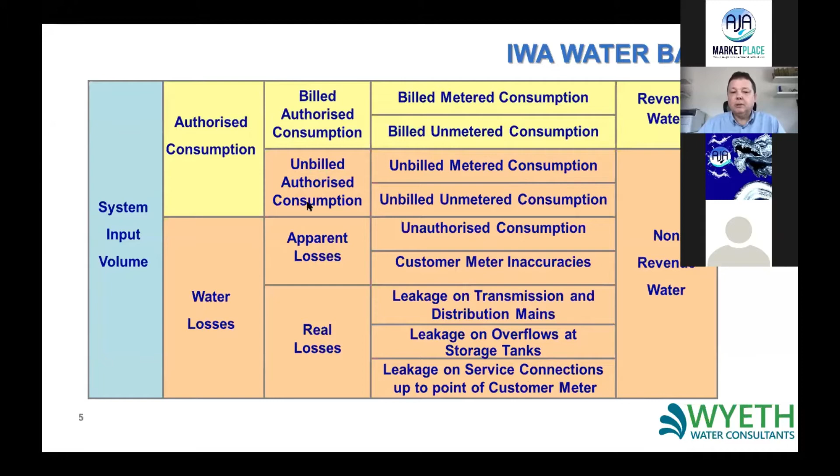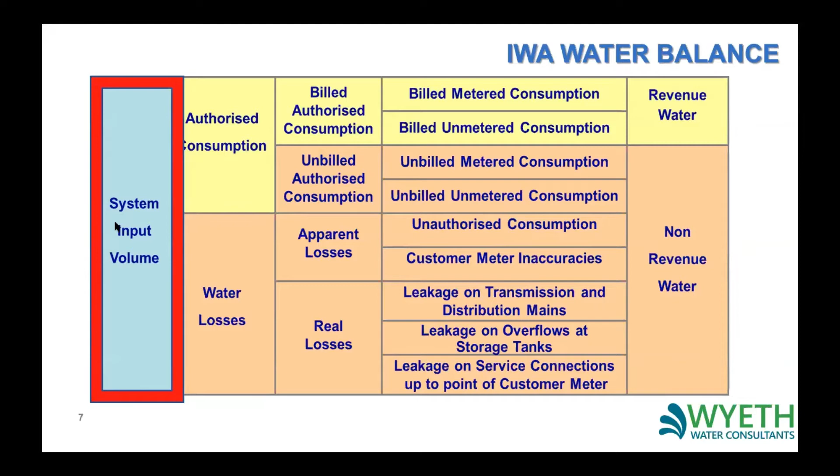So let's start with flow monitoring. One of the key things we need for flow monitoring is, as I've already mentioned, the flow coming from your water treatment plants. If you're not logging or measuring the flow from your water treatment plants, then you really can't start to calculate your non-revenue water. It's one of the key components of calculating the volume of non-revenue water that you have.

So for all of your water treatment plants, you need to be looking to see how many outlets there are from the plant, how many pipelines are being fed from the plant, either under gravity or under pumping. And you need to be installing some production meters that are actually measuring that flow rate. You can see here an example on the right, which is actually an electromagnetic production meter. We'll talk a bit in a minute about different meter types, but the electromagnetic meters are probably the most accurate flow meters that you can get.

So if you are looking at measuring your production, you need to consider that you probably haven't got too many treatment plants and not too many metered outlets are required. So it might be somewhere around 10 to 20 of these meters. So purchasing some good quality, accurate meters is probably a good thing to do at the beginning. And as you only have a small number of them, then for this case, the electromagnetics would be good.

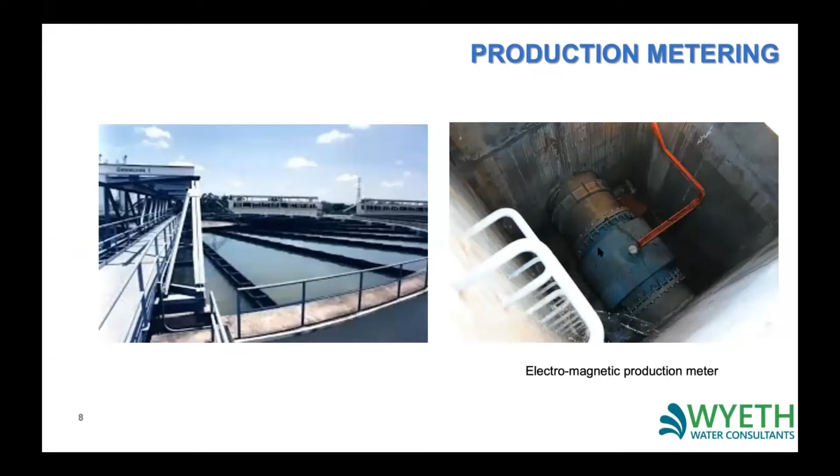These electromagnetic meters are full bore, so you would need to cut the pipe and insert the meter in. And obviously, as they get bigger, the meter price itself gets more expensive, and also the installation costs get greater as well. Whereas for ultrasonics, you're really going to be almost the same price no matter what the pipe diameter is.

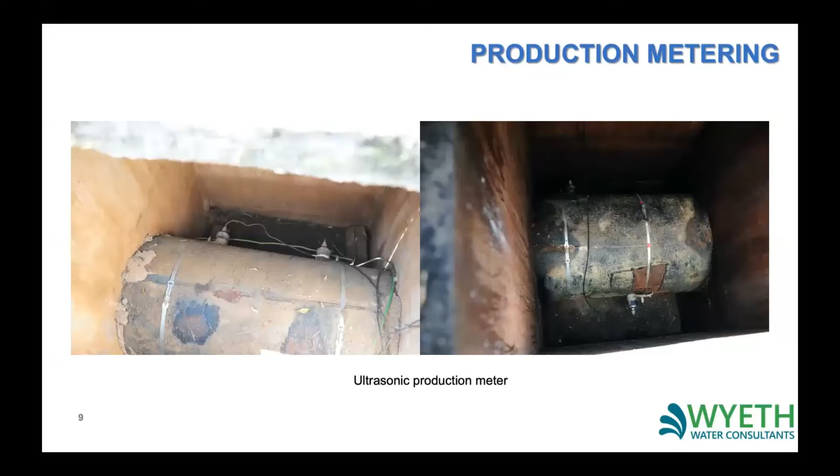So what does it look like in accuracy terms? I think Ryan showed this table last week. And I mean, these are just indicative accuracy ranges. If you actually speak to different meter manufacturers, they'll probably give you the true accuracy ranges.

But a lot of your meter manufacturers have their accuracies calculated on big test rigs that they have in their factories. So when you put them out in the field, there's going to be a number of different issues that can actually affect the accuracy, including things like pipe material, temperature of the water, straight length of pipes. So don't always believe what the manufacturers say - there's going to be some leeway in what the accuracy is really going to be.

But you can see here that the electromagnetic flow meters are probably going to be the most accurate. But if you look at the ultrasonics, you can see that there's still a relatively good accuracy, which is between 0.5 and 1%. So whichever one of these you choose, you're going to be below 1% accuracy of your production metering.

There are a few other metering options - insertion probes, mechanical meters and such - which you could look at depending on the cost side of it. But with the mechanical meters, they're really more for small diameters.

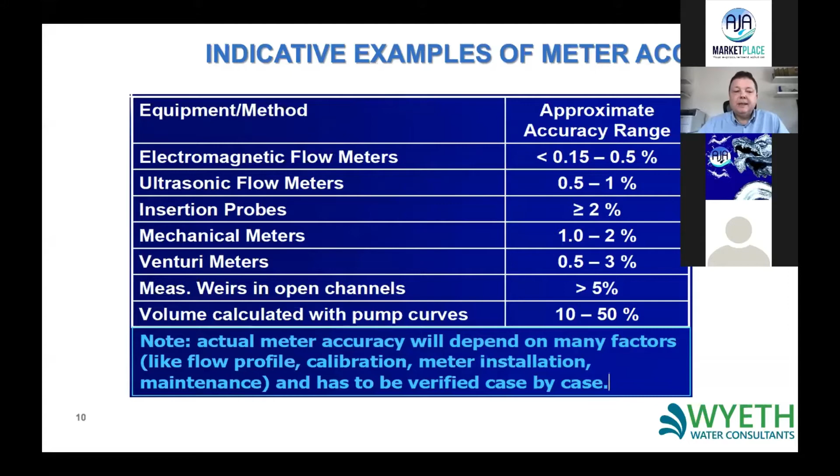But once you've put the meters in, as I've mentioned, they do need maintenance. You can't just put the meters in and then forget about them. Some manufacturers have calibration software which you can connect the meter up to a laptop and do some calibration, but really they're only calibrating the electronics.

So you may have to do some validation of the flow rate as well. You can do drop tests. For example, if the meter is coming out of a reservoir or flowing into one, you can close the outlet or inlet and measure a drop in the reservoir level, then compare that volume to what's gone through the flow meter. That gives you an idea of whether you've got the volumetrics right.

You could also use an insertion probe, which we've already talked about. If you install one just downstream of your production meters, you can compare the insertion probe with these meters. You're not going to get exactly the same flows because of different accuracies between metering technologies, but at least you know if you're in the right ballpark within 2 to 4%. If you're out by 20%, then you know there's obviously an issue.

Now, some water utilities actually buy their water rather than operating the treatment plant themselves, either from a third-party treatment company or from a neighboring water district. If you're buying water from somebody, it's even more critical that you're measuring your production accurately, because that's affecting how much you're paying for the raw or treated water coming into your system.

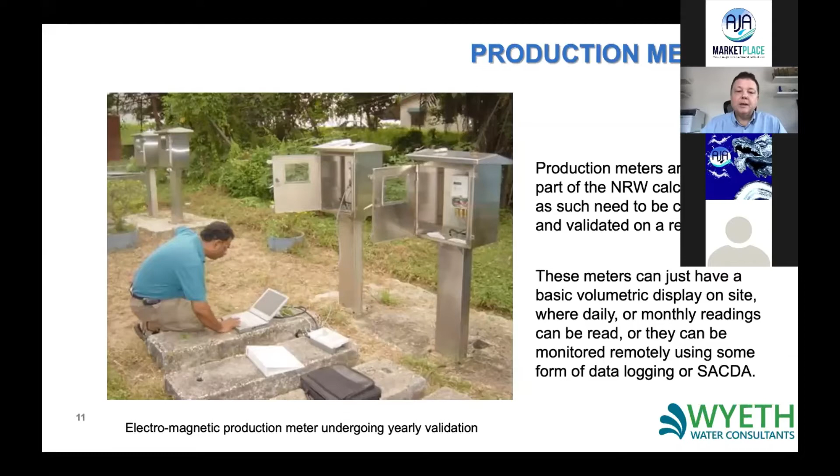The other option, often used by a lot of people, is to use data loggers or a SCADA system. You have communication from the meter, logging the flow rates, then sending the data off to a control room or control center, which can be at the treatment plant itself or at the water utility's offices. That way you get flow patterns, not just totalizers or volumes over a time period, but you can see when water is being used more or less than other periods.

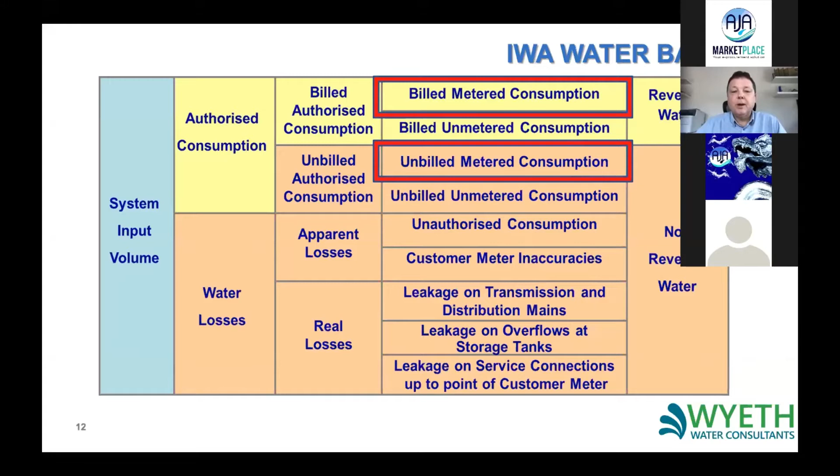The other key metered component is customer metering. In the water balance, we have two components: billed metered and unbilled metered. Billed metered is everybody with a meter, and at the end of or during each month the meter reader comes around, reads their meter, and they get a bill. The second is customers who have meters but for some reason we don't bill them. This could be a decision made by local or federal government, for example churches or military camps. They may have a meter, but politically you can't bill them. But even though we're not billing them, we should make sure we're metering them so we know how much water they are consuming.

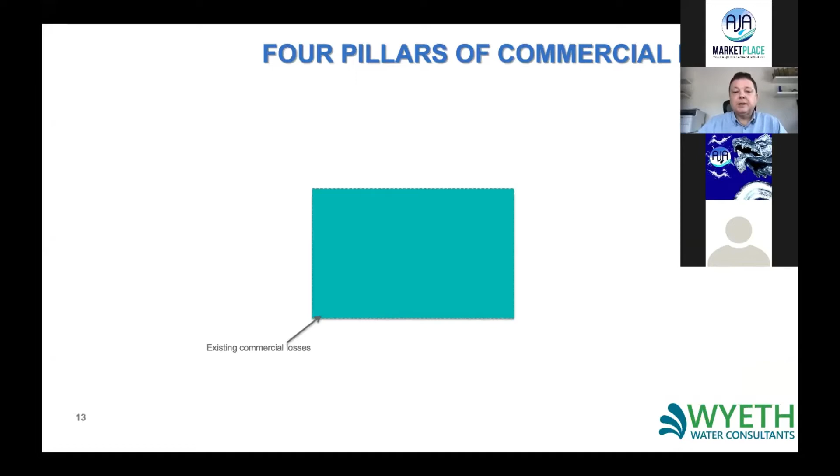If we look at commercial losses - because this is the metering, the customer metering side - any errors we have there are what we call commercial losses, because not only does it affect your non-revenue water, it actually reduces the revenue coming to the utility. So if you can maximize the efficiency of your customer meters and the billing side, you're actually going to maximize the revenue coming into the utility.

So all utilities will have an existing volume of commercial losses, symbolized by this green box here. And then we also have what we would call an economic target of commercial losses.

Economic target means we're weighing up how much we're spending on things like meter replacement, meter billing technology, and meter reading technology. On the other side, we have the weighing up of how much revenue we would get. So there's an economic target we want to aim for. We're not going to get it down to zero, but we want to get it down roughly to that economic target, and what do we need to work on that can help affect that?

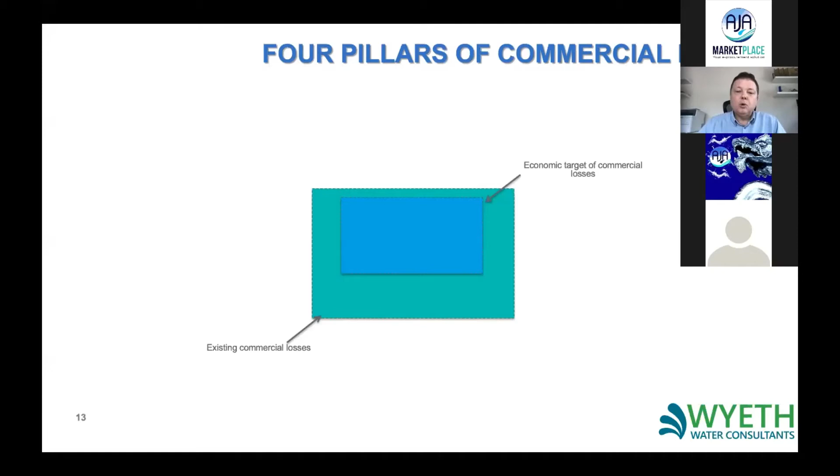Well, we have meter under-registration. This is your customer meters that are no longer accurate. Hopefully, when you put a new meter into the ground or install it on a customer's pipework, it's going to be fairly accurate. But over time, the accuracy of that meter will start to reduce as the meter wears and gets tear from just performance of the meter. So you need to be deciding when do I need to replace those meters once the accuracy gets too low.

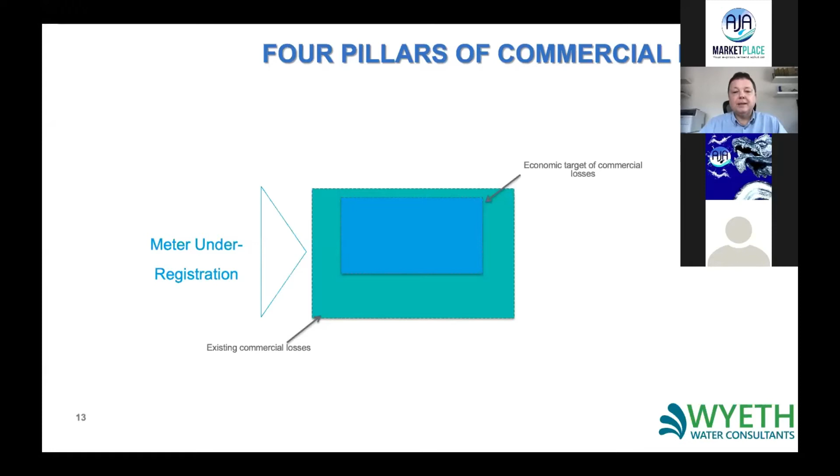We have theft of water. Something that's quite important in some countries is people that steal water. This is not something we're going to be looking at today, but it can be a large portion of your water losses, or it can be a small portion, depending on how big a problem it is in your utility.

Then we have meter reading errors. So how do we go about and read the meters? Then how do we issue the bills to the customers? I'll talk a bit about that in another slide coming up.

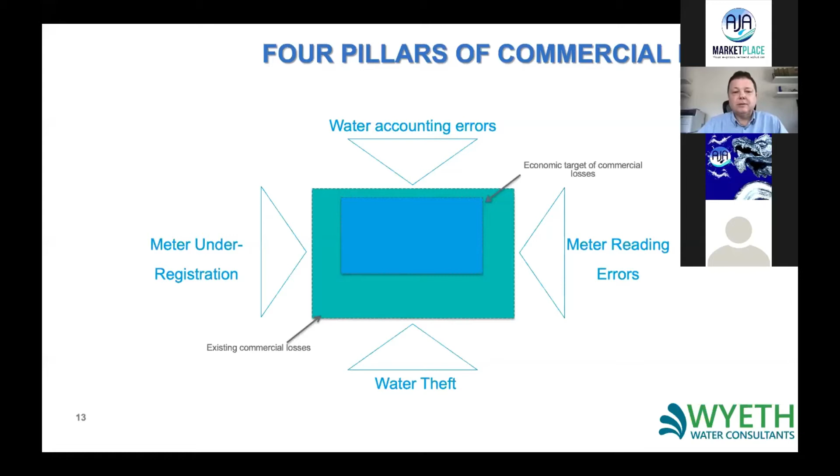And then the last one is water accounting errors. So once we've read the meters, we then need to put those meter readings into a database, a customer database, before we issue the bills. I'm sure most people have used Excel before, and they've typed in the wrong number into an Excel sheet and wondered why there's errors coming up. Well, if you have a system where you've got thousands of numbers that need to be inputted, then you can see where we could have errors that are occurring.

So we're looking to resolve all four of those issues. And if we can resolve all four issues, we can actually reduce the existing commercial losses, and we can then move it down to that economic target.

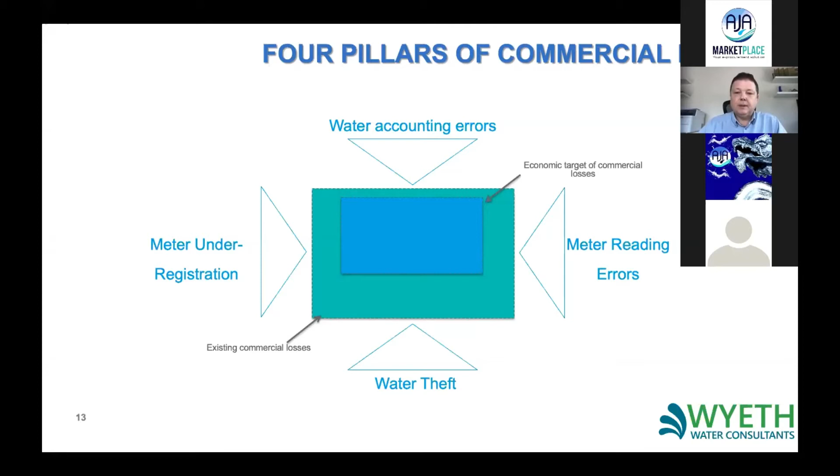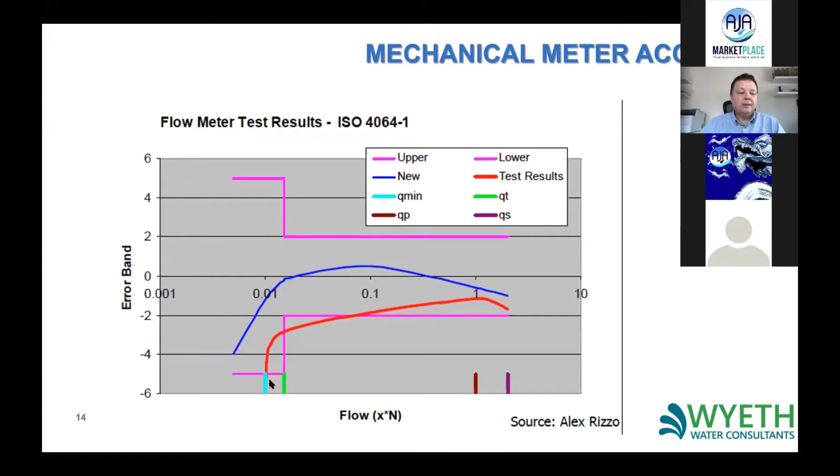The red line shows you an older meter. You can see that over time, the meter is worn out. So even at the beginning, at the higher flow rates, we're already outside of the accuracy of a new meter, and you can see that accuracy drops off further. So even before we get to QT, we're already outside of the meter accuracy that we would be seeing.

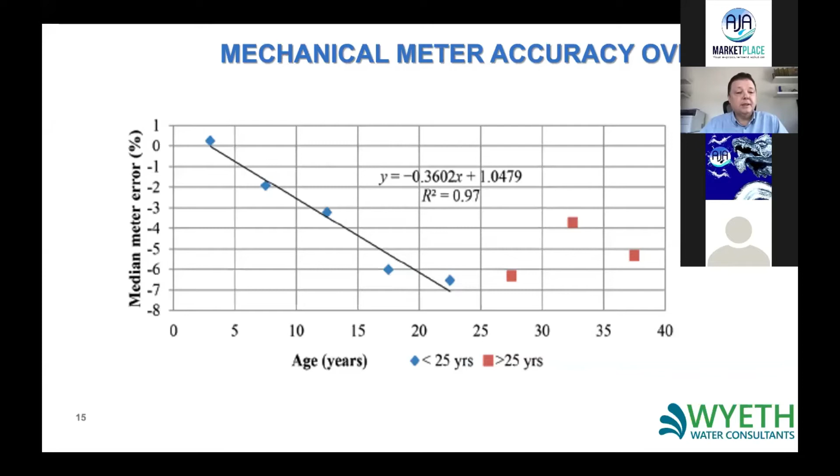So when replacing your meters, it's always good to use some good quality meters. Generally, when we're looking at residential customer meters, we want to be using mechanical meters.

There are a few more advanced meters out in the market now - a lot of electronic meters, and also either electromagnetic or ultrasonic ones. With the electronic function, they have a lot more functionality, where they can log hourly demands and give you alerts if they think there's a leak inside the customer's property. So if you're looking to upgrade from the basic metering type, some of the electronic meters would be an option. A lot of water utilities are also looking at electromagnetic meters for the larger diameter customers.

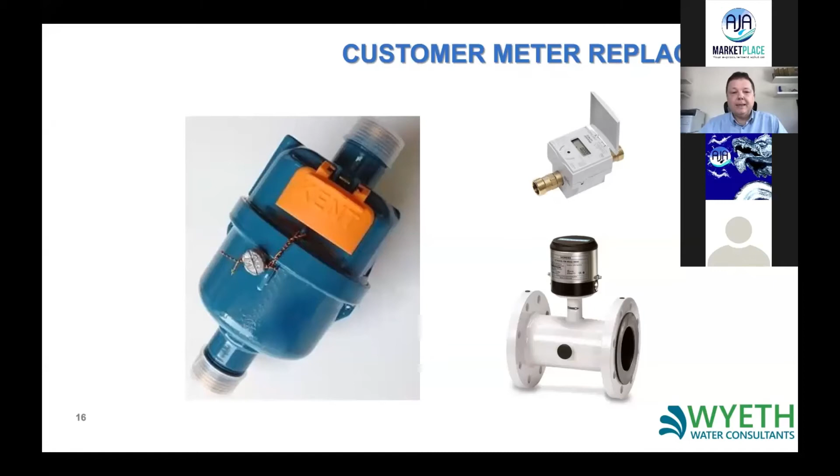Now, billing - I mentioned about the billing side of things, and the very basic way is that you have a meter reader, and the meter reader goes out with a piece of paper. He writes down the meter reading. That paper then goes back to the water utility, where somebody types it into the billing database. Then the bills get printed and sent out to the customers.

When you're using that basic system, there are so many ways that errors can creep in. The meter reader can actually read it wrongly, or type it or write it wrongly. Then when it gets back to the office, someone can type it in wrongly, and there are other errors that can happen when you start printing the bills as well.

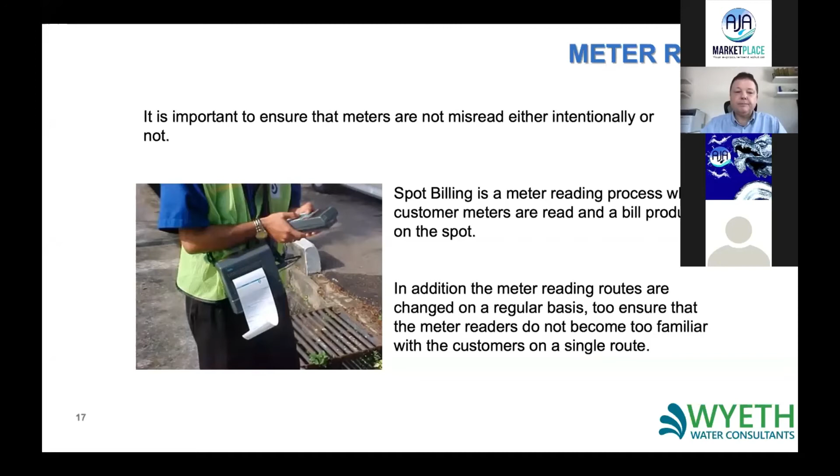That means if anything happens to the meter - let's say it was to break or fail - and if you're only reading the meters every 30 days, if that meter were to fail 5 days after the meter reader read it, you've got 25 days with no data being recorded by the flow meter. It would be very difficult to argue with the customer when you go back to them and try to give them an estimated reading.

So if you have a data logger on there that is recording, it would pick up that something has happened with the flow meter, and you could quickly get out there and replace it to make sure you're not losing any revenue.

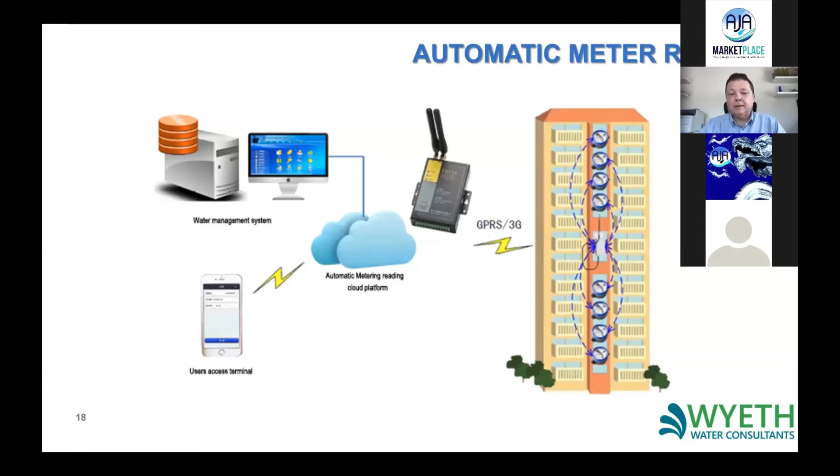So that's the flow metering on the water balance side of things. But we're also looking at district metering as well.

That can be down to, in general, the fact that you have hundreds of kilometers of damaged and leaking pipes due to the poor quality of the pipe, the age of the pipe, and the pressures in the pipe as well.

So one of the key things that we want to be managing is the non-revenue water in these distribution networks. But because it's so large, you can have a water utility with a huge distribution network, and that network may have something like 30, 40, or even 50% non-revenue water from leakage. It can be very difficult to actually pinpoint where the problems are.

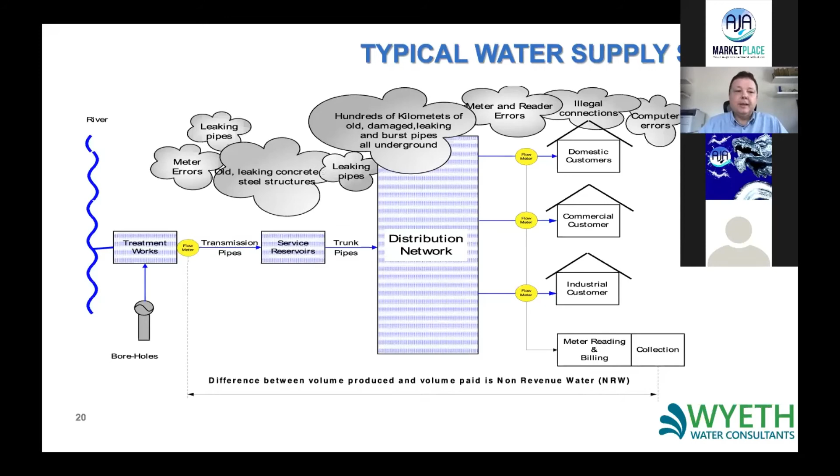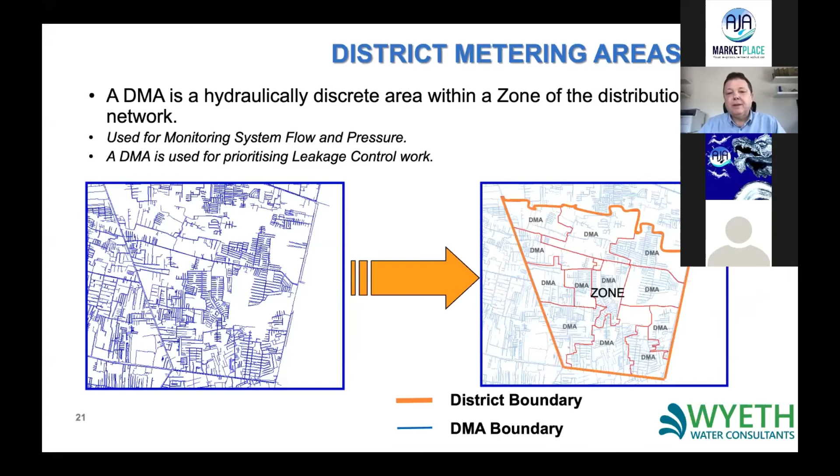Before we have DMAs, it's very difficult, as I mentioned, to actually identify where the actual leakage problems are, because we're only measuring flow at the treatment plant and your customer meters. You just get a general overview of the non-revenue water.

And when you have leakage teams, they don't know where to go. So basically you're just sending them out in hope that they're going to find some leaks, which they do sometimes, but a lot of times they may not find any leaks, or the proper leaks. This then makes the leakage teams a bit demoralized because they don't see any benefit from what they're doing, because the non-revenue water levels are not really dropping.

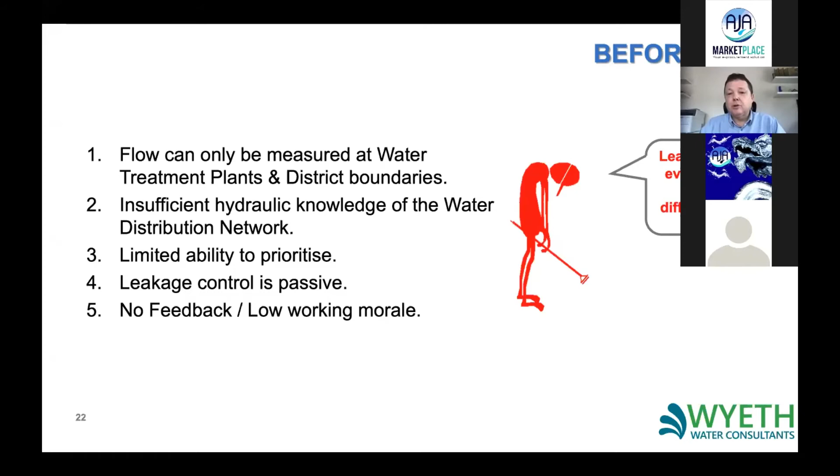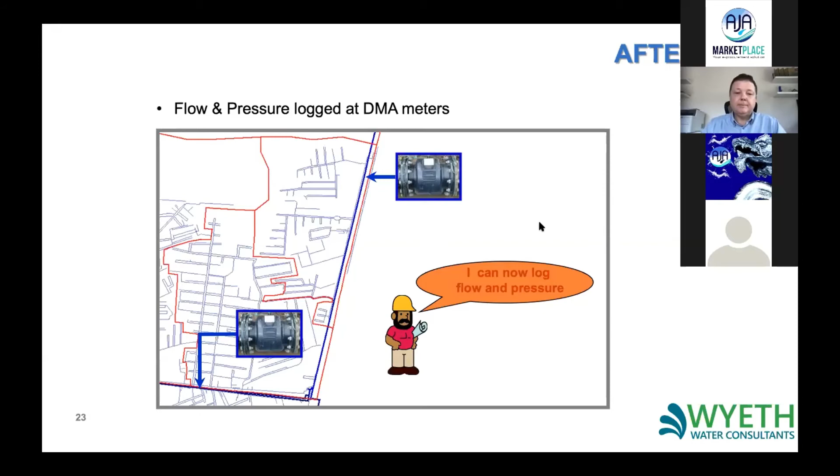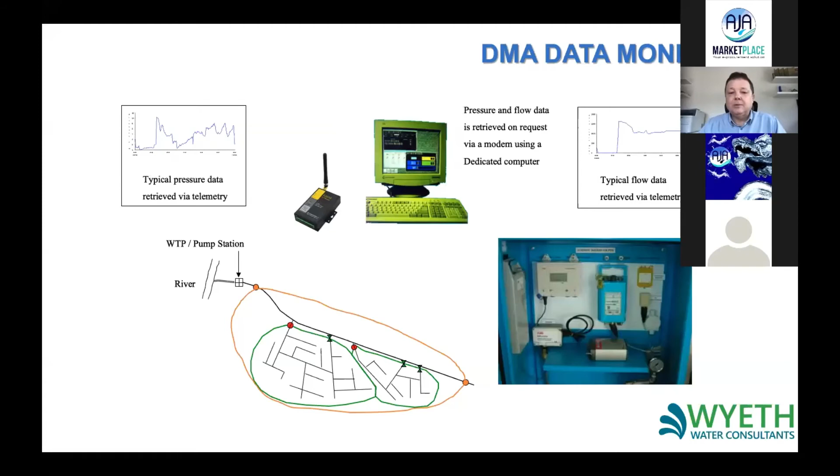We can also use data loggers that have GPRS or 3G communication as well. So these data loggers record the flow and pressure from the flow meter, and then they send the data back via GPRS or 3G on a daily basis back to our control rooms, so that we can analyze the DMAs to work out what the leakage volumes look like.

And this is what we're looking at - we're actually looking at a typical daily flow pattern going into a DMA. You can see that the flow at night is low, and that's generally true because at nighttime, most of our residential customers are asleep in their beds, and most commercial customers are shut as well.

All of the shops, supermarkets, they tend to be closed or using minimal flow, and it's only really some industrial customers that are actually operating at nighttime. Then during the day, we have the peaks in the morning, and then we have an evening peak, and then it drops down at night.

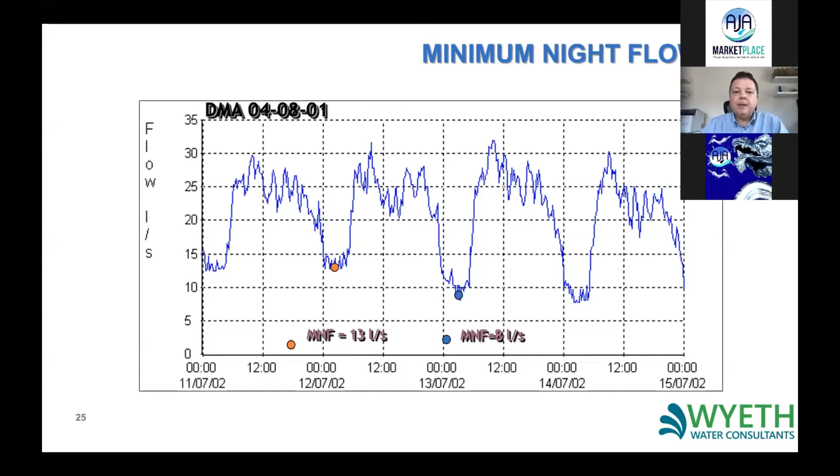But it's not truly what the leakage levels are, because as I mentioned, there are some customers that are still using a bit of water at night - there may be some industry, maybe some hotels, or even some people that are awake using water. So what we have to do is subtract the legitimate night flow, which is the customer use at night.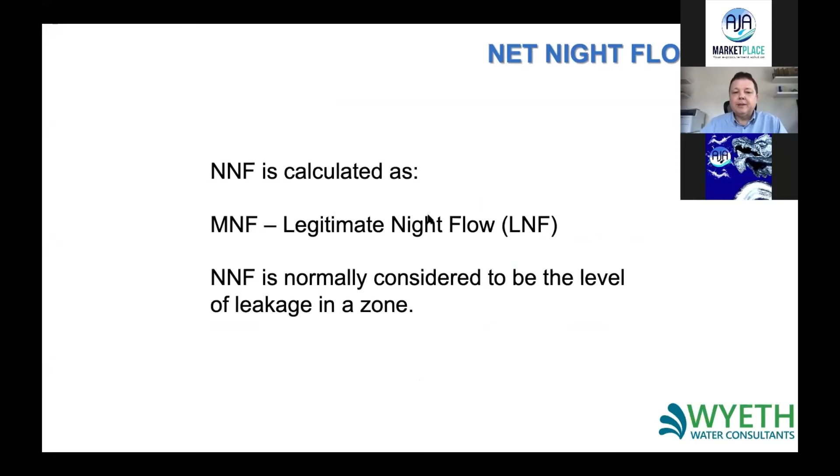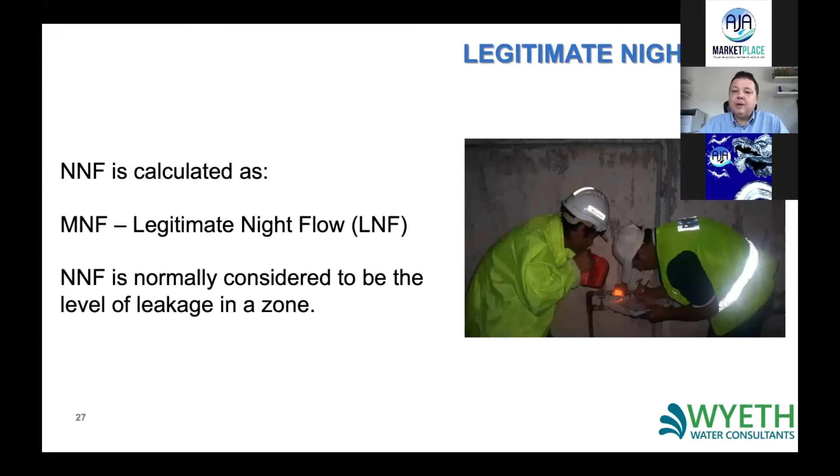We subtract it from the minimum night flow, and we come up with what we call net night flow. To do that, we need to know the legitimate night flow. How do we do that? Well, we have our staff actually going out on site reading the customer meters, at night, during a certain period, so that we can calculate what is the legitimate night flow.

We have some pretty standard forms that can be used. In this one, we're reading the customer meters at 3 time steps - time 1, time 2, time 3. It's up to you what times you want to use. You could do midnight, 1am, 2am, or 1am, 2am, 3am, as long as you're getting a period during that nighttime when you're measuring the lowest flow.

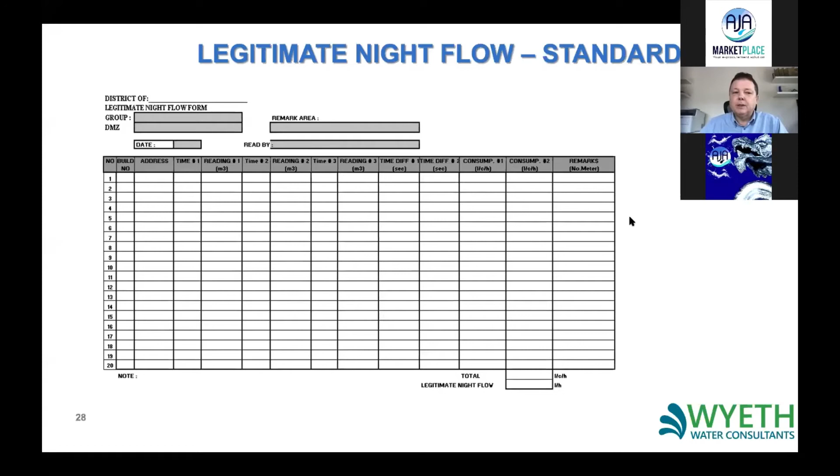Now, you don't want to be measuring every single customer. So if this DMA is a housing area with 1,000 properties, you don't want people reading 1,000 meters every hour. So what we actually do is read a sample. For example, if you have 1,000 properties, you might read 50 of those, use that as an average, and multiply by 20 to get the total legitimate flow for all of the residential housing.

For some of the other metering types, like commercial and industrial, if there's not so many of them, sometimes you may only have 10, 20, 30 of those per DMA. Then it's important that you actually read all of them, because they can all be quite different in the amount of water they're using. From that, you can calculate the total legitimate flow for that DMA, and if you know the minimum night flow, you can calculate the net night flow.

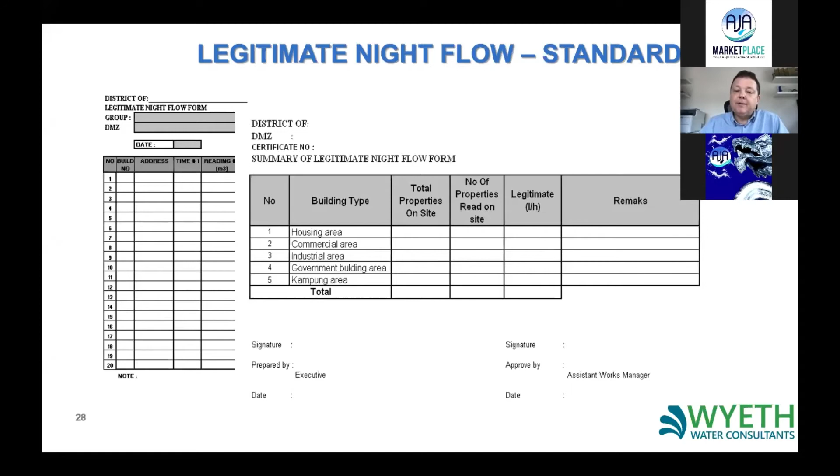Another factor you need to consider is what we call the T factor - this is the pressure in the zone over 24 hours. Because pressure is inversely proportional to flow, at nighttime, when you have your lowest flow, you actually have your highest pressures. That means you have higher leakage levels at night because of higher pressures. In the daytime, when flow picks up, pressures drop, and leakage volumes drop as well. So looking at your net night flows at night will not necessarily indicate the true leakage over the 24 hours.

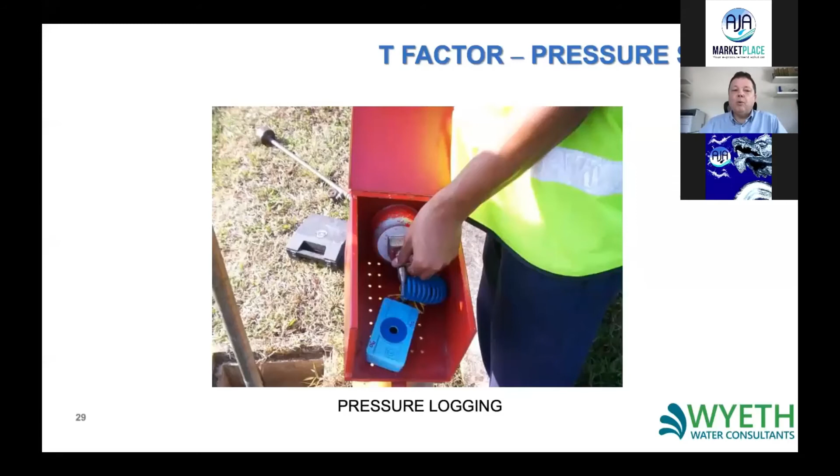So we do something called T factor pressure testing. What we do is measure pressure across a DMA, in 2-hourly intervals, to give the highest and lowest over that 2-hour period. We then get the average pressure every 2 hours, and then we create a leakage index.

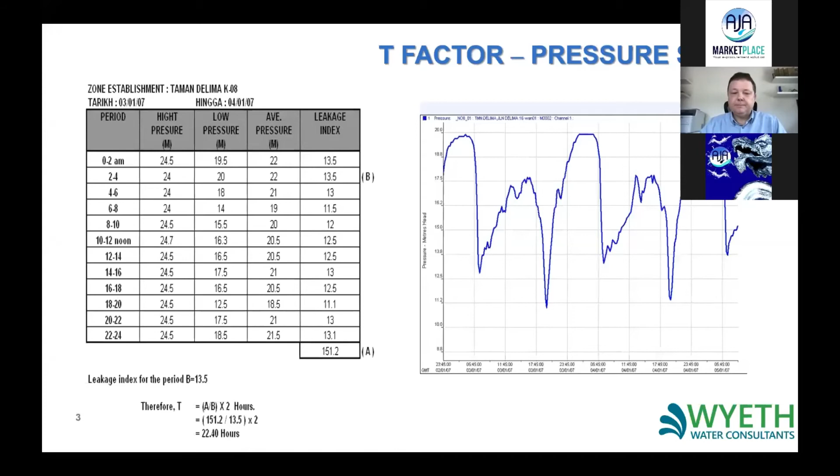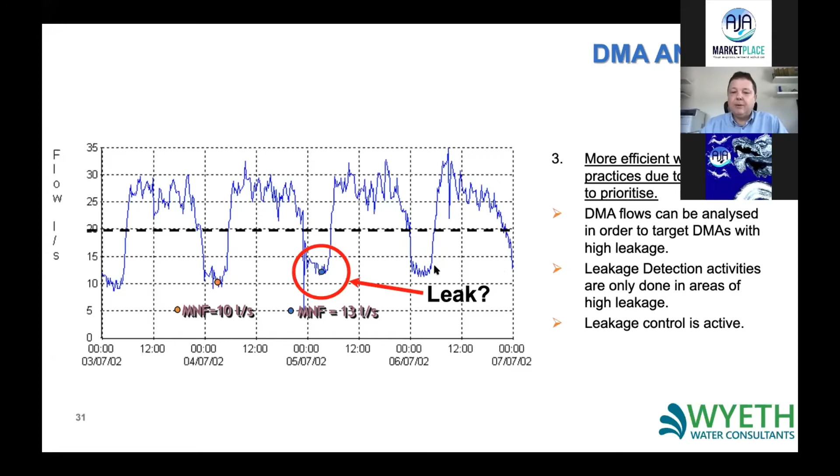So we would need to send our leakage teams out to investigate. Once they go out, hopefully they can find a leak that's caused that 3 liters per second jump. Then hopefully we can go out, repair the leak, and you can see that the night line will drop down, down here to below 8.

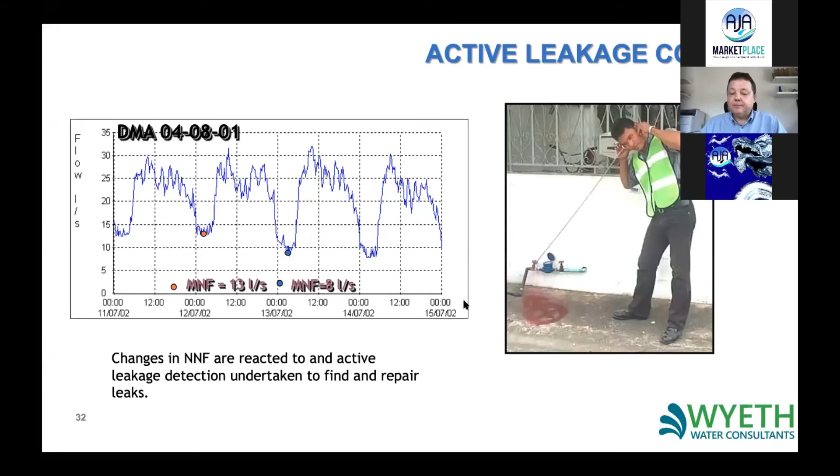But of course, not all leaks are large. So you're not going to see a jump from 10 liters per second up to 13 liters per second in one night. What often happens is we just get small leaks occurring all over the place.

What level of net night flow do I find acceptable? It could be that you set it at 5, 10, or 15. It just depends on the time interval. So if it's 4 months to go from 4 to 15, maybe they could bring it down to 10, so that after 2 months they could go in and address it. The intervention level would depend a lot on the water utility itself - how many staff you have to go out and do leak detection, and how much of a problem you see the leakage level rising from 5 to 10 to 15.

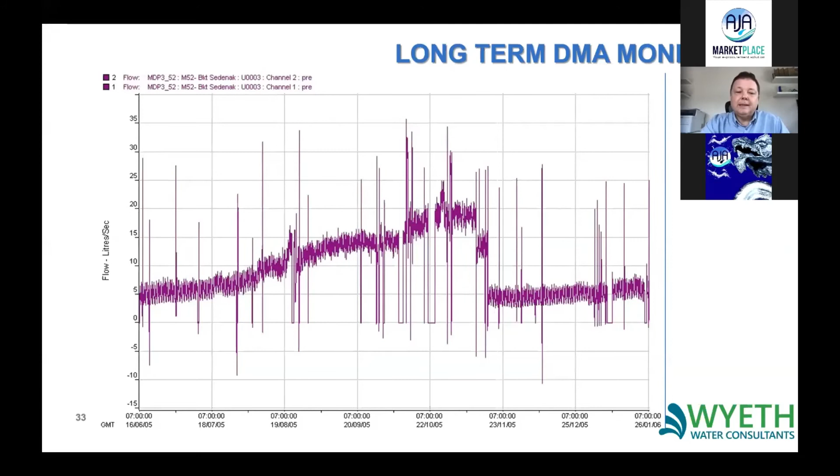This just shows you over a long term what we would see happening. The night flows would keep rising up and up until you hit that intervention limit. Then you would do leak detection and repair, drop it down. Then you'd see that level increasing again, do leak detection and repair, and see it going up again. It's a continuous program of monitoring the night flows, seeing them gradually increase until it hits that intervention limit. And the intervention limit, as I mentioned, can be adjustable - you can adjust it over time, either up or down, depending on the situation you're in.

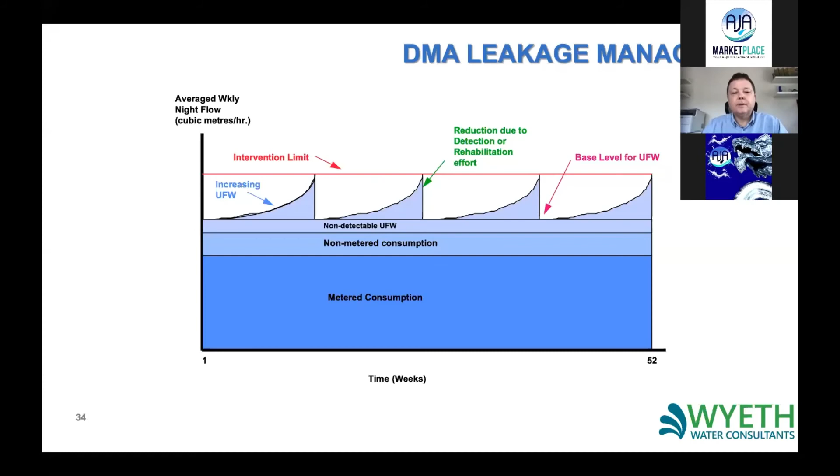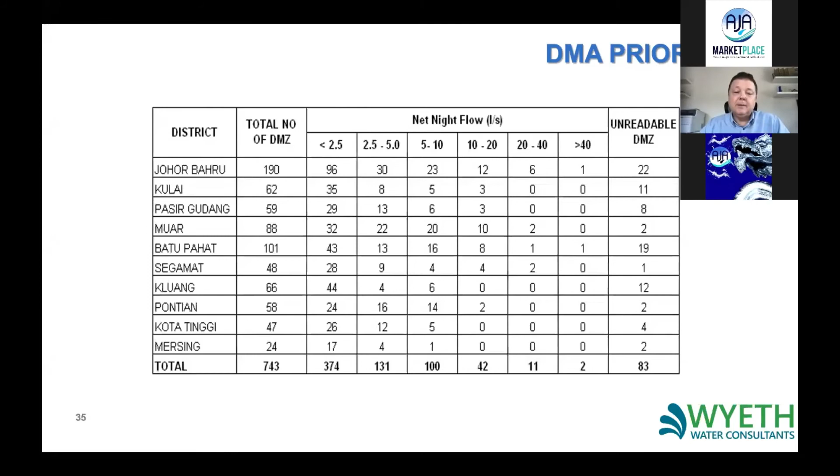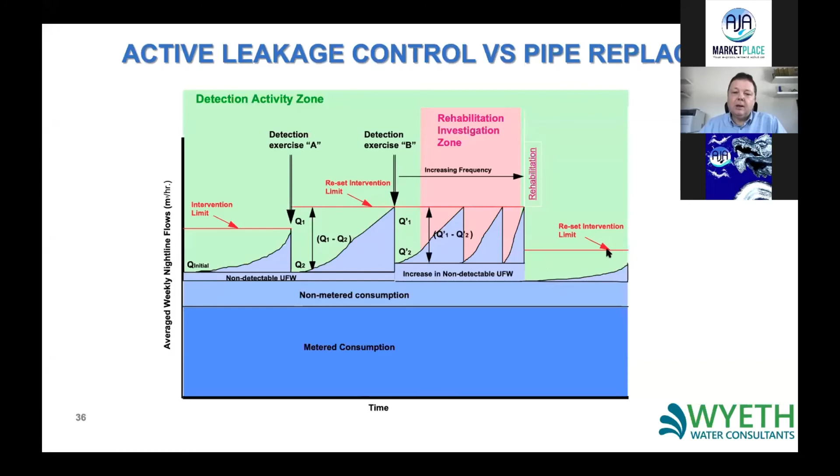Now, when we're looking at the night lines, which give us a leakage volume, that's not the only bit of data that we can get from our non-revenue water information.

So we can start off with the total non-revenue water volume. If you have a DMA with a flow meter on the inlet, you can measure the volume of water going into that DMA over a 1 month period. If you've also got all your customer meters read every month, you've got the consumption. So if you take the volume in minus the consumption, you've got your total NRW volume.

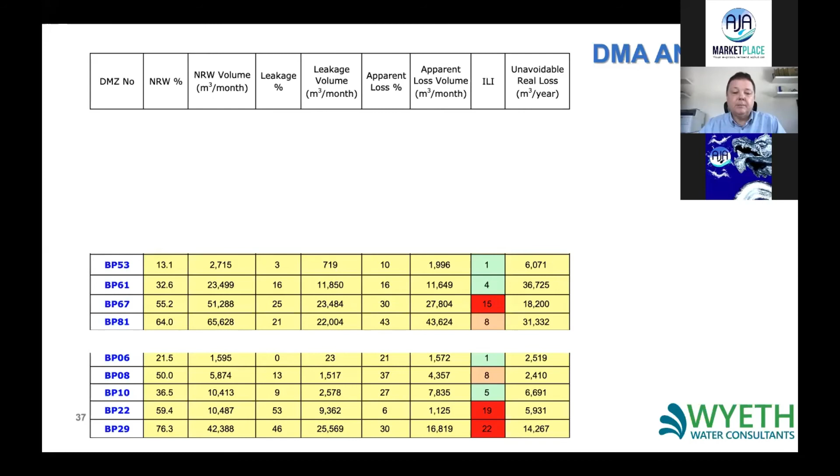So with your DMAs, you're basically looking to prioritize your leak detection and repair, especially if you have a large number of DMAs, and any pipe rehabilitation or replacement works. This can help you identify which DMAs need pipe replacement, and also which DMAs would benefit from customer meter replacement. This then helps reduce your NRW, gives greater efficiency, a stronger pipe network, and improved revenue.

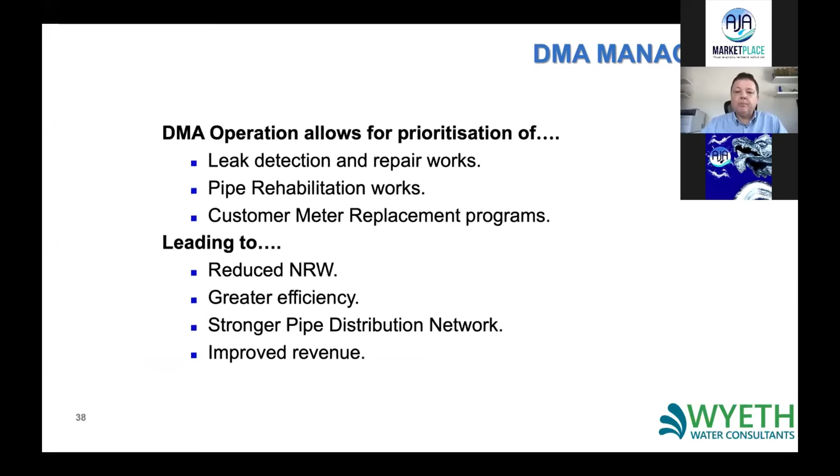So we're now going to move lastly onto pressure monitoring. We've already talked a bit about pressures when looking at the T factor and at DMAs, but we're going to look at specific monitoring now.

Probably one of the key areas for a lot of utilities is reservoir level monitoring. This is actually measuring the pressure level in your tanks, or the level of water in the tanks. You can go for a very basic data logger where you just have a pressure sensor on the outlet pipe, and the logger records that pressure and sends the data back on a daily basis. Or you could go for a more complicated SCADA system, which is online, so you've got a continuous feed of what's happening to the level in the tank.

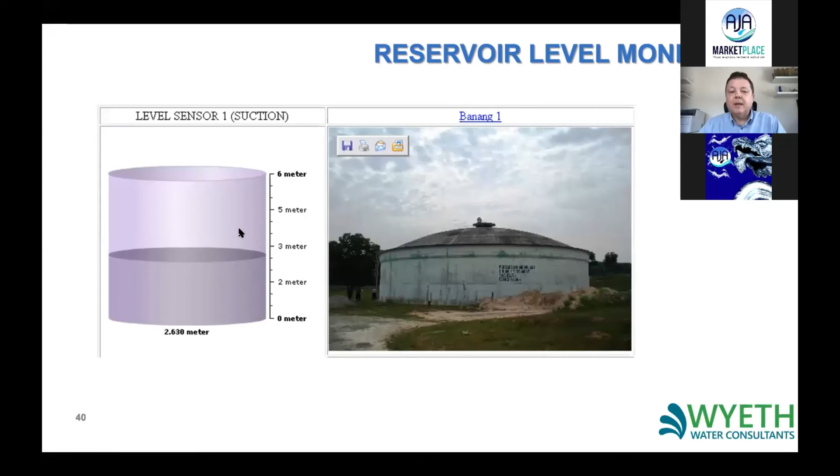Whichever way you go for, what we're really looking for is to identify where we're getting leaks coming from tanks, or more critical, overflows from tanks. When we've got recordings of the level of water in the tank, if we get flat lines at the top water level, that's indicating there was some overflow, because the water got to that top level and then you were losing water and it was just a flat line. So by having some sort of monitoring, we're actually picking up these overflow activities.

As we've noticed, you have low flow at night because your customers are not using the water. This means that the water flowing into your reservoirs is actually filling them up at night rather than flowing out to the customers. So quite often when reservoirs start to overflow, it's in the middle of the night, between 2 and 4 in the morning. If we don't have any staff around, especially if the reservoir is in a remote location, you may not have any indication that it's overflowing at all. So by having some sort of level system on your tanks, you're actually going to be able to identify those issues quickly so that you can resolve them.

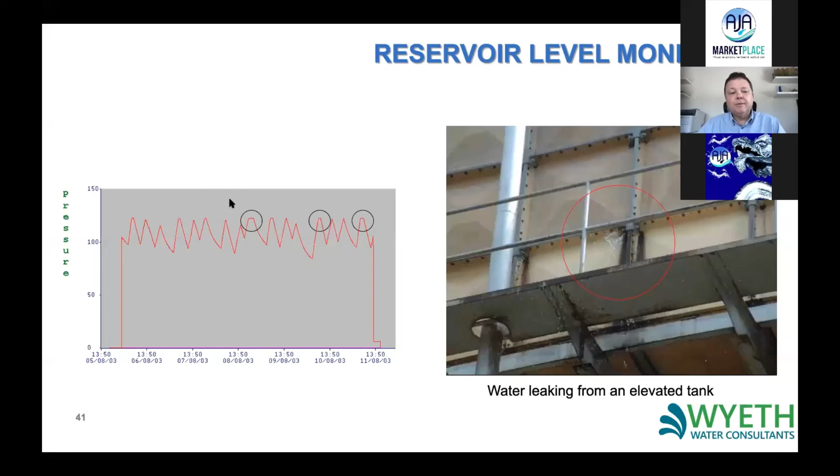The other pressure management that we can do is actually in the DMA. We've already talked about having a DMA, and you've got a flow meter going into the DMA so that we're measuring flow in. But we can also use a pressure reducing valve to control pressure in each individual DMA.

When we're using pressure reducing valves, it's very critical to consider two different pressure points. We have what we call an AZP, your average zonal pressure, which is the average pressure point in your DMA. But we also have what we call a critical point, your lowest pressure point in the DMA. That can be either an end point at the end of the DMA, or it can be at the highest point on a hill somewhere. But somewhere in your DMA, you're going to have a critical point.

It's very important that you're logging the pressure at this critical point, especially when you're doing pressure management programs using a PRV.

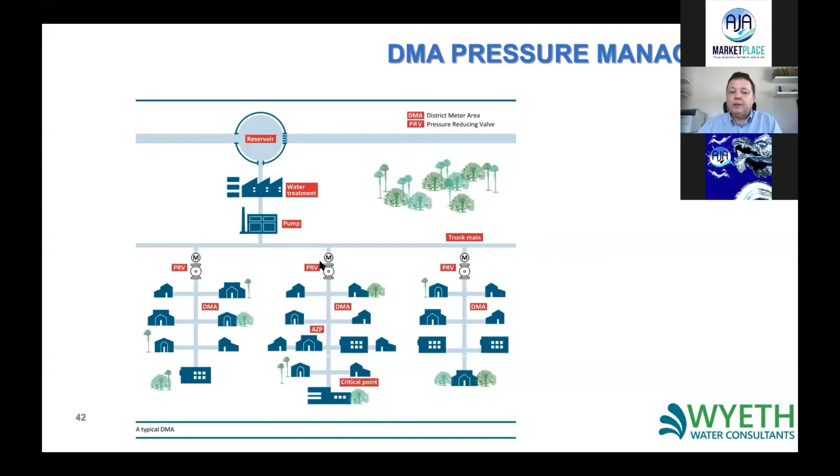This is just showing you what happens. You've got your pressure upstream, and then you've got your pressure after the PRV, so the PRV is knocking the pressure down. But then over your DMA, you're going to get head loss due to the flow going through, friction of the flow going through your pipes. So at the end of your pipe network, you have your minimum pressure, your lowest pressure, at the critical point. You can see here that the pressure has dropped from 60 down to 20 meters due to frictional head loss across the DMA. But friction is actually created by flow.

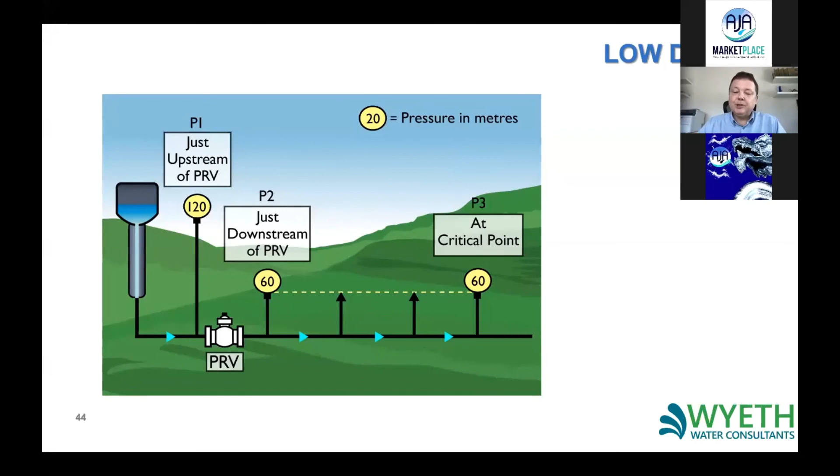So at nighttime, when we have that low flow, you can actually see the pressure going up. You can see here that there's almost no head loss at night, so we've got a pressure at the end here of 60 meters. So your critical point pressure is going to be changing over a 24-hour period. And if you're going to be setting the PRV up, you need to know what the pressure is doing at peak flow, because that's when you want to be setting your PRV so that you don't have too low a pressure during the peak demand period.

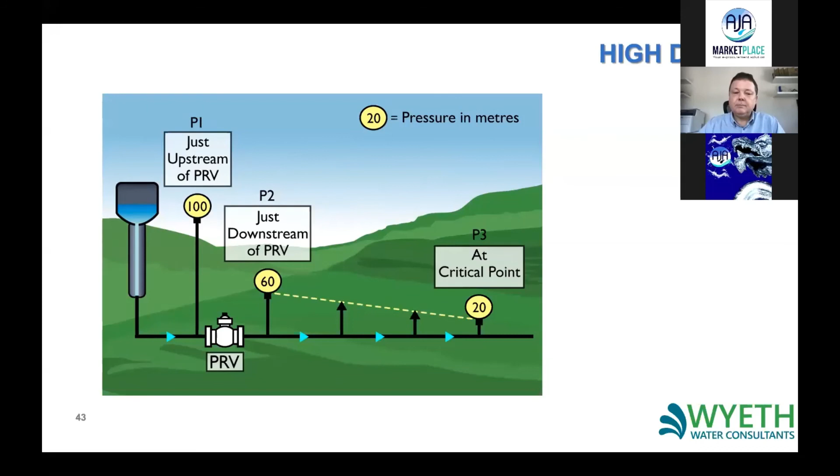And this is what you would actually see happening. You've got the outlet of the PRV as the blue line, and the pressure at your critical point is the green line. So at nighttime, you've got high pressure, and during the daytime, you've got your lower pressures. So it is quite variable.

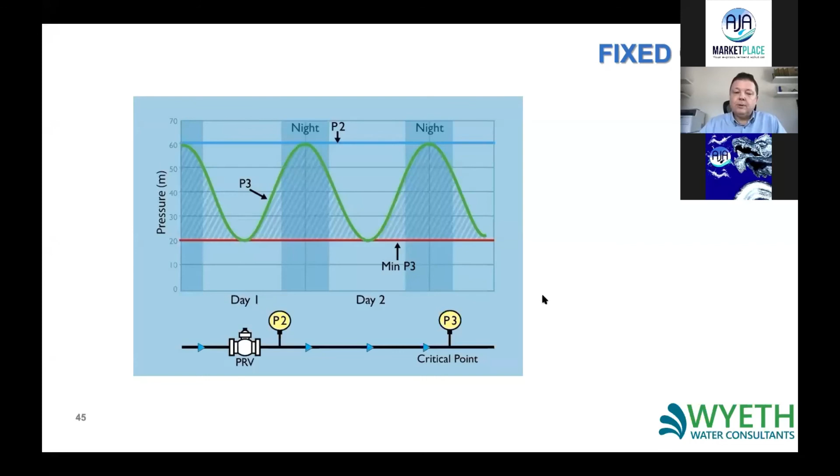Now, with your PRVs, you actually want to control the pressure. And the reason why we want to control that pressure is to reduce the leakage. There's a very good relationship between pressure and leakage, and it's a linear function. So basically, if you reduce pressure by 10%, you're going to reduce your leakage by 10%.

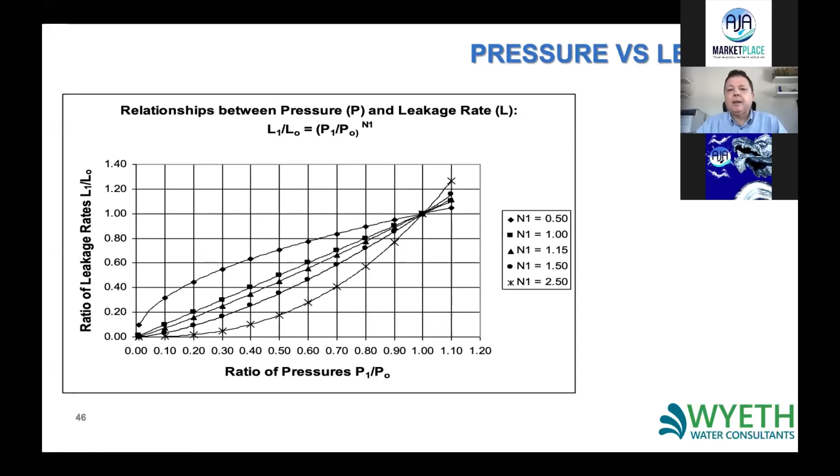For example, if your system had 50 meters pressure and you reduce it down to 40 meters, that means you've reduced your pressure by 20%, and your leakage volume would then reduce by 20% as well. Similarly, if you only have very low pressures, maybe you've got only 10 meters pressure and you reduce it down to 8 meters, you've also reduced it by 20%, and your leakage volume would reduce by 20% as well. So pressure management is something that can be done not just when you have very high pressures, but also at low pressures. You can see small adjustments in your pressure can have a big impact on the leakage volumes.

Moving on from that, you can actually have more advanced controllers that also measure the flow. So what they do is, as the flow goes down, they drop the pressure, and as the flow comes up, they increase the pressure. So they're a lot more advanced in controlling the pressure and giving you a much more stable pressure at your critical point. So that is really how we look at pressures.

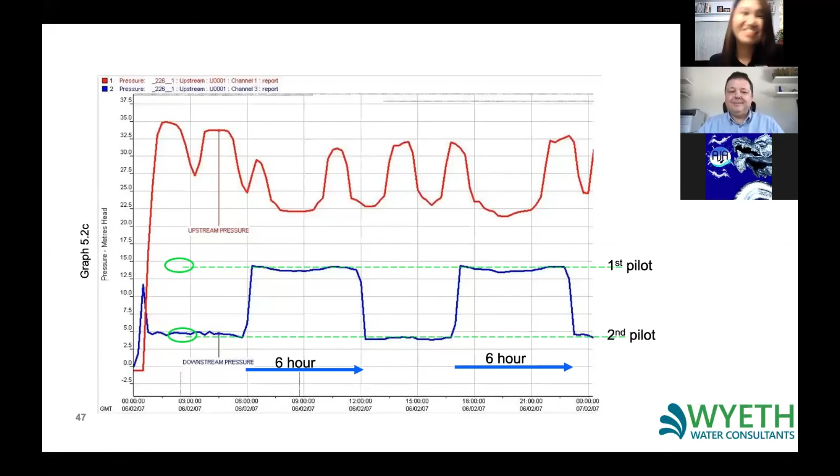As Gary said, there are a lot of factors affecting commercial losses, for example, and I appreciate how Gary emphasized the issues which lead to commercial losses. I believe these are really something that should be considered while coming up with short-term or especially long-term water management strategies to increase revenue and decrease NRW. Also, it is important to have knowledge on different flow meters and also be updated on the new technology available for meter reading and customer billing, because you cannot really control what you cannot measure. So accurate and active flow measurement, as well as the right equipment to use, is very important.